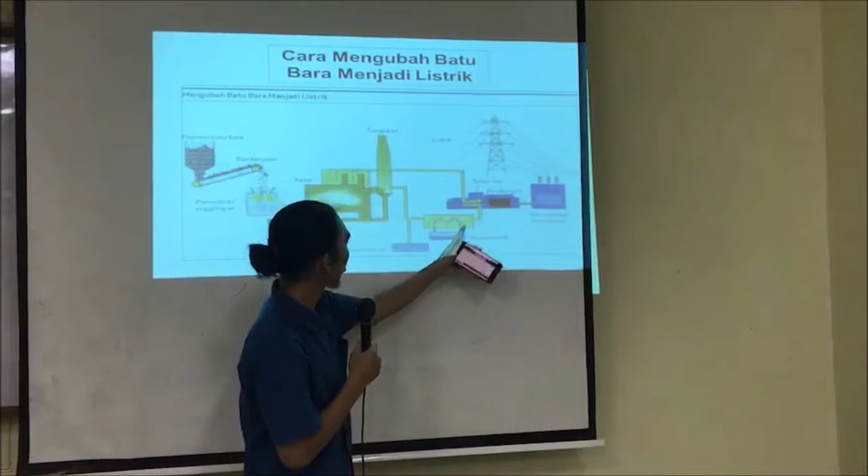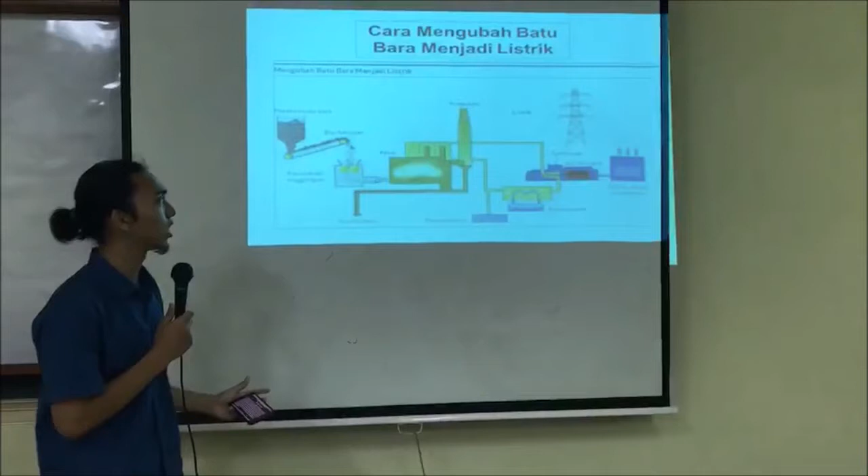Most coal was formed hundreds of millions of years ago, when much of the earth was covered by steamy swamps. As plants and trees died, their remains sank to the bottom of the swampy areas, accumulating layer upon layer. Eventually, a dense, spongy material called peat formed.

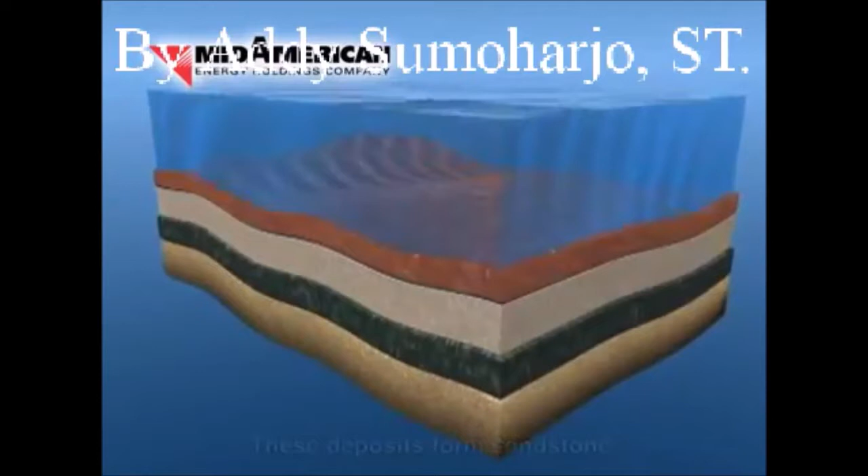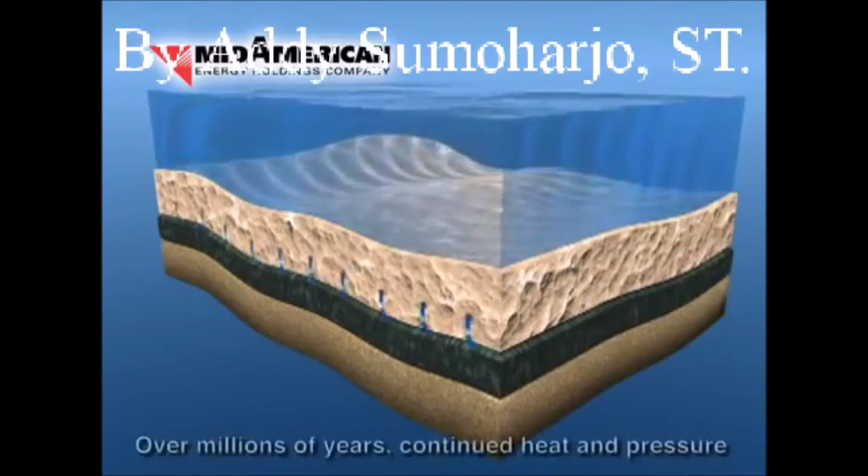The Earth's surface gradually changed. Seas and great rivers deposited sand, clay, and other minerals on top of the peat. These deposits formed sandstone and other sedimentary rocks, and buried the peat beneath the Earth's surface. Their weight squeezed water from the peat. Over millions of years, continued heat and pressure gradually changed the peat and sediment into coal.

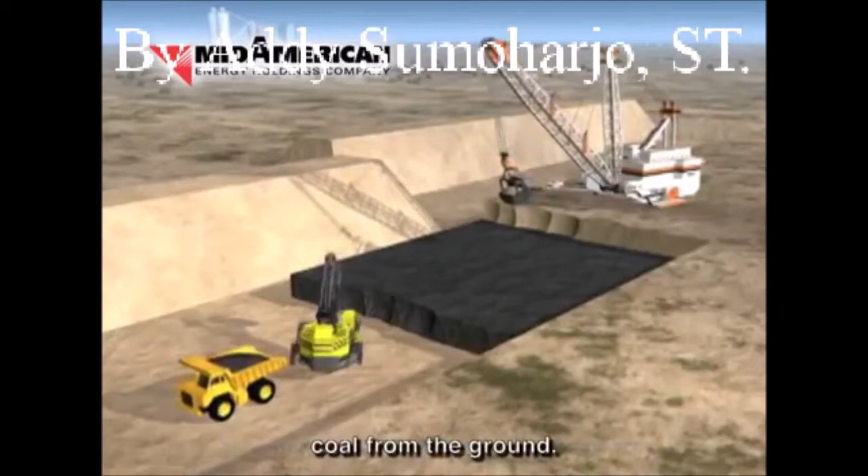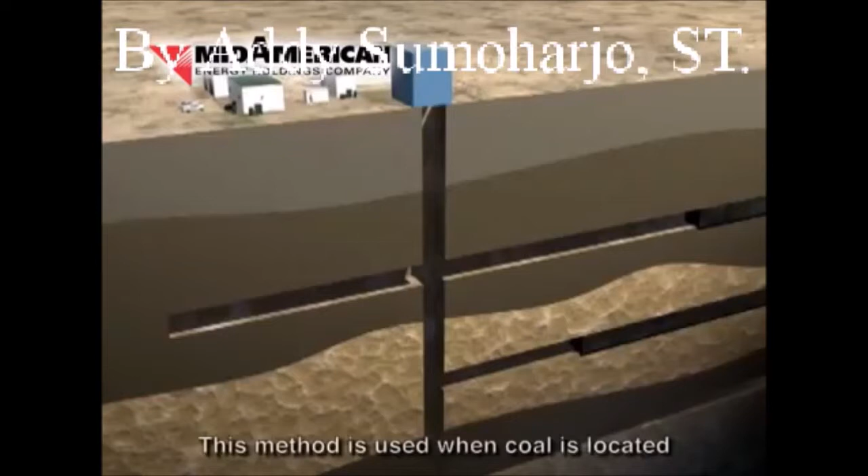There are two common ways to mine coal from the ground. The first method is used when coal lies close to the surface. With surface mining, topsoil and layers of rock are removed to expose the coal. The second method is underground mining, sometimes called deep mining. This method is used when coal is located several hundred feet below the Earth's surface.

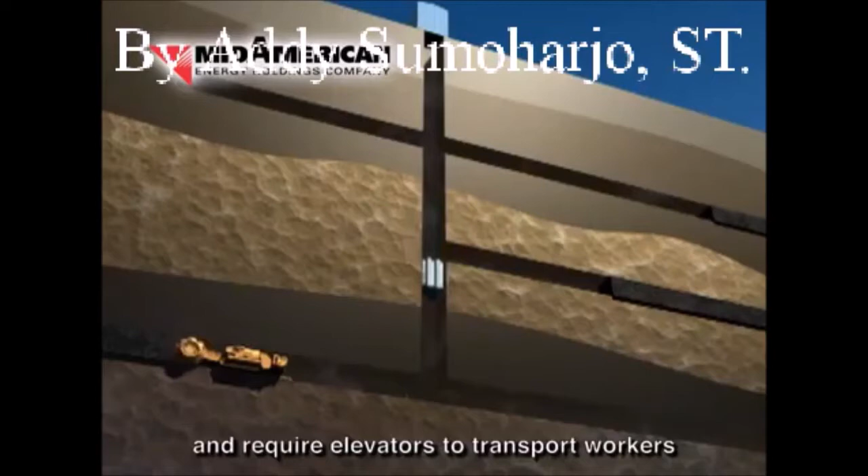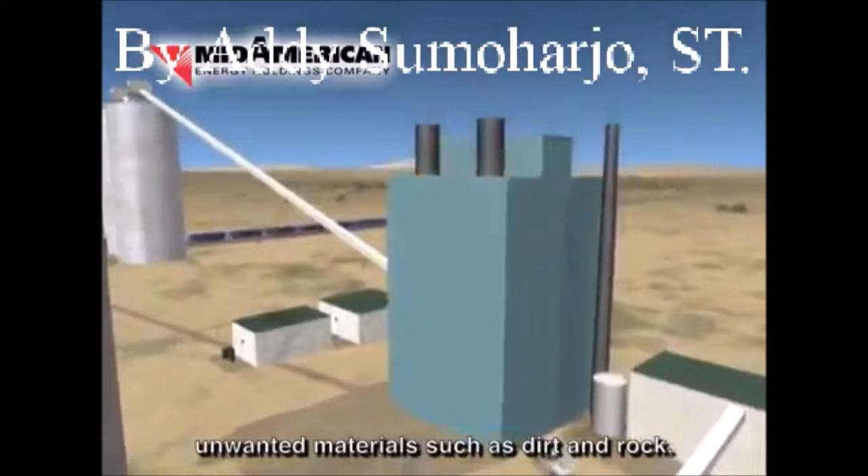Underground mines can be up to 1,000 feet below ground and require elevators to transport workers to the bottom of the mine. Once the coal is removed from the earth, it typically travels by conveyor belt to a preparation plant located at the mining site. There, it's cleaned and processed to remove unwanted materials such as dirt and rock. After the coal has been processed, it's shipped to market.

Most coal in the United States is transported by train. However, coal also can be shipped by barge, ship, or truck.

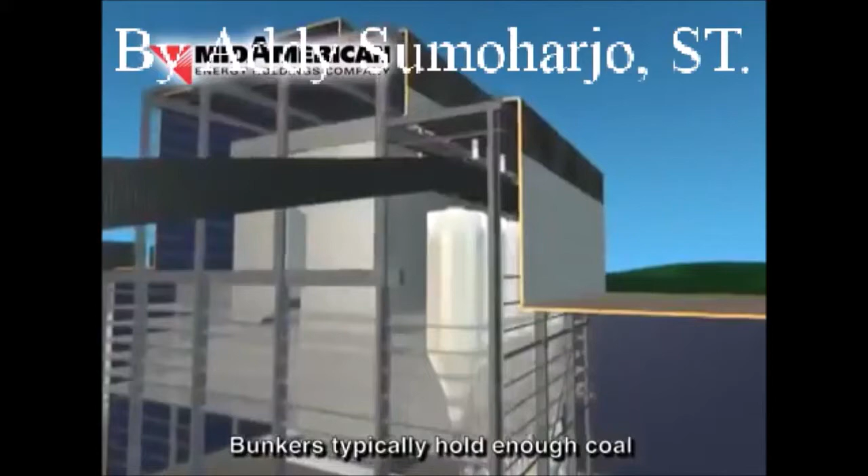The coal arrives at the power plant and is unloaded into a storage area. When needed, it's moved by conveyor belt from the storage area to bunkers in the plant. Bunkers typically hold enough coal to fuel the power plant for approximately half a day. From the bunkers, the coal is fed into mills that pulverize it into a very fine powder.

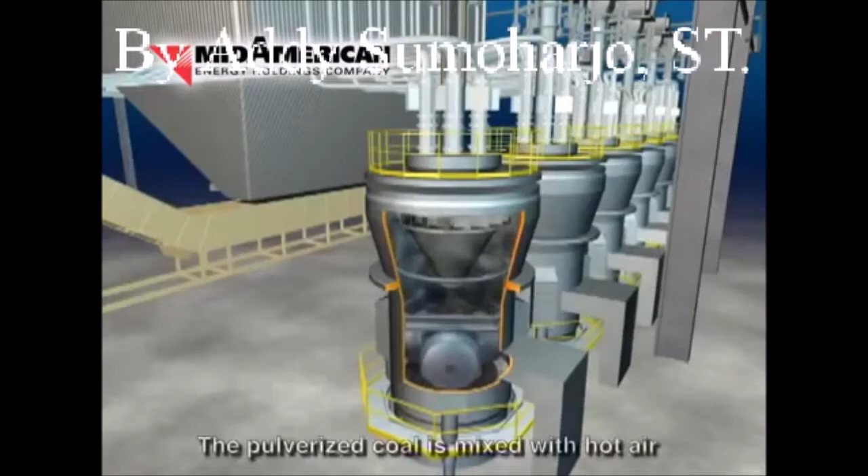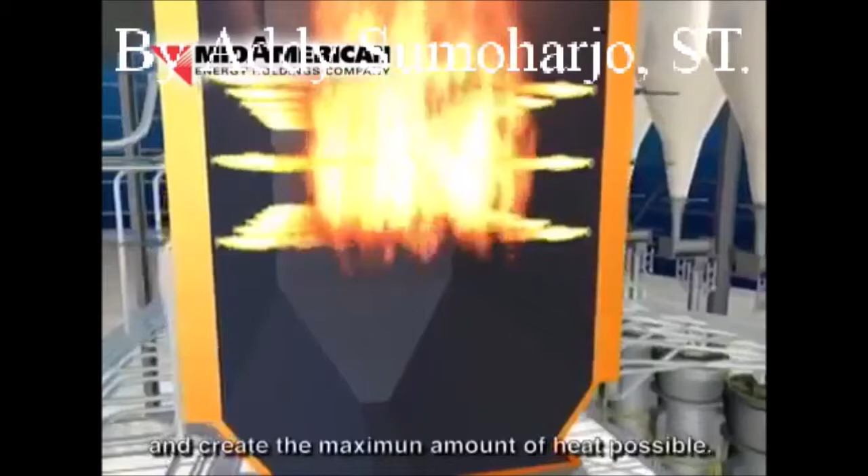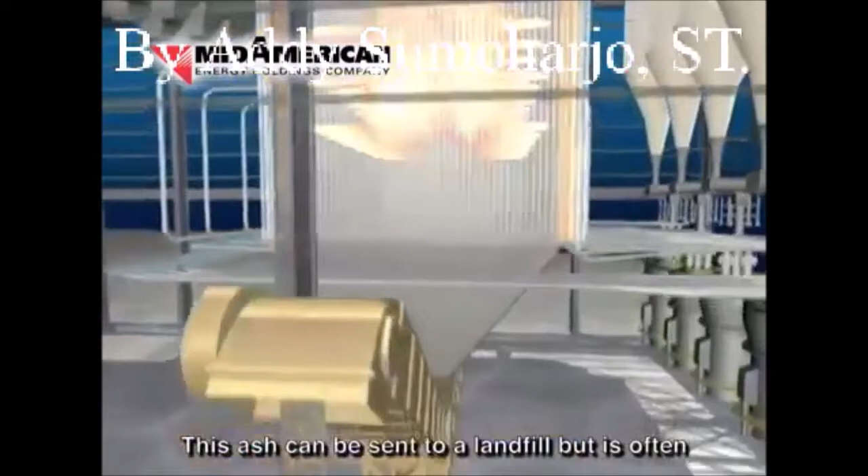The pulverized coal is mixed with hot air and blown into the boiler. Inside the boiler, burners ignite the coal and air mixture to achieve complete combustion and create the maximum amount of heat possible. Coal combustion residue called bottom ash collects in the bottom of the boiler. This ash can be sent to a landfill, but is often sold as material for roadway construction.

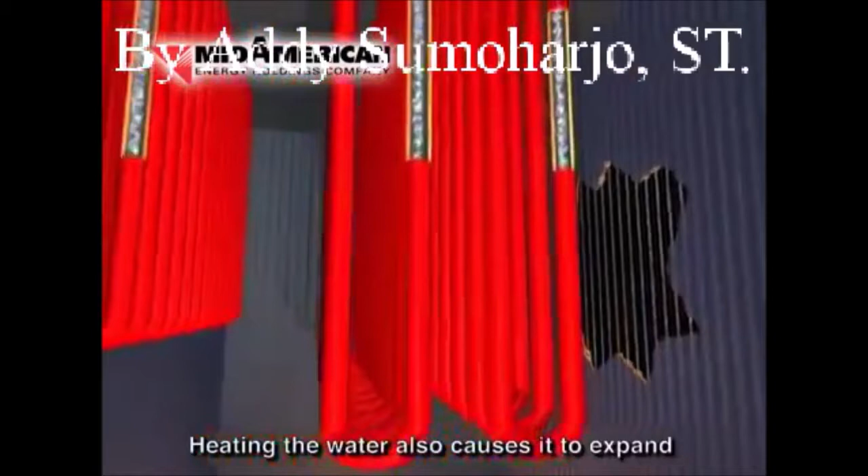The intense boiler heat turns water in tubes into steam that can reach up to 1,100 degrees Fahrenheit. Heating the water also causes it to expand and increases the pressure in the pipes up to 3,700 pounds per square inch. The steam passes through 4 turbines before it is turned back into water and used again.

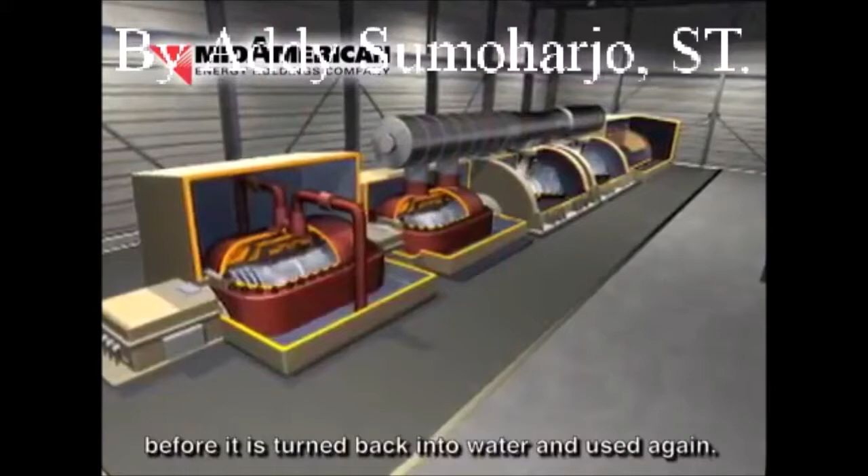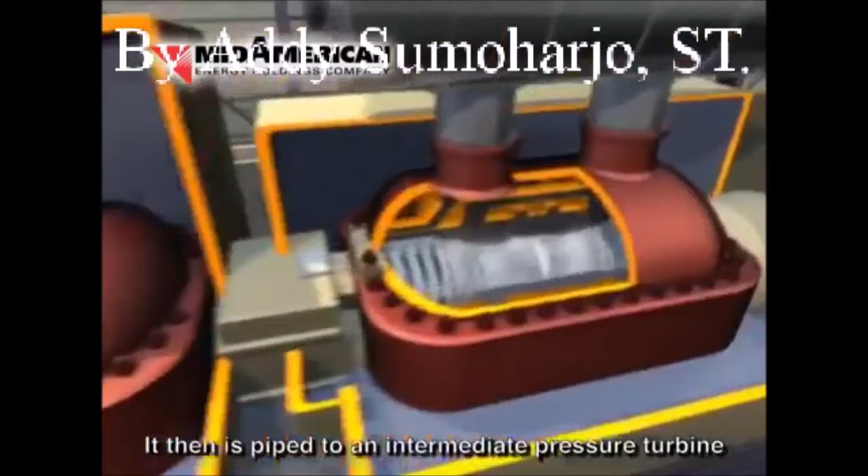The steam first is piped to a high-pressure turbine and then is returned to the boiler to be reheated. It then is piped to an intermediate pressure turbine and finally to 2 low-pressure turbines. The steam blasts into each turbine, turning blades that are attached to a single shaft.

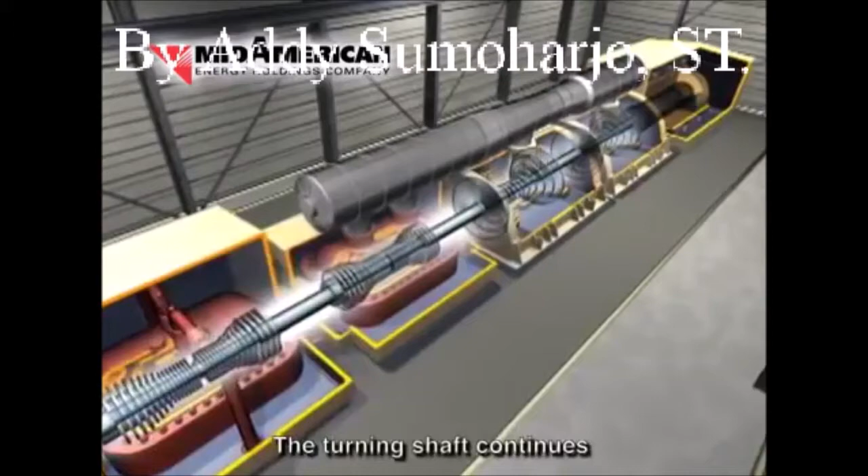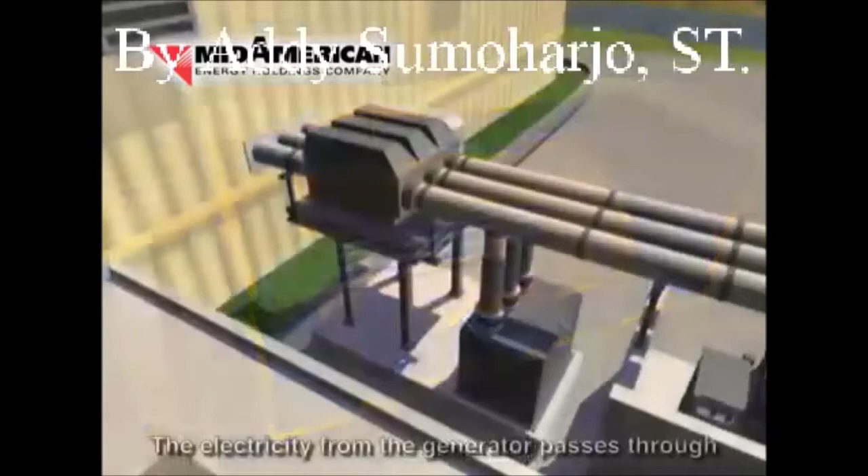The turning shaft continues into the adjacent electrical generator. As the shaft rotates, it turns electromagnets within a series of wire coils to produce electricity. The electricity from the generator passes through a step-up transformer where its voltage is increased. It then travels through the power lines that carry it to homes and businesses.

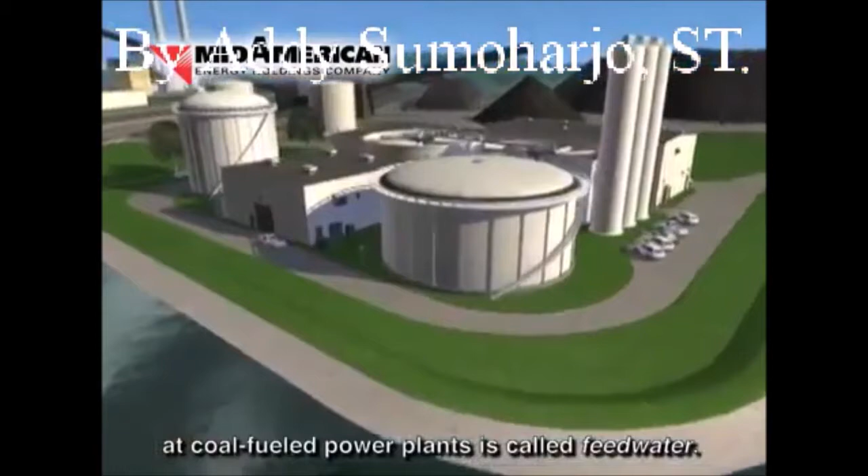The water that is heated into steam at coal-fueled power plants is called feedwater. This water typically is supplied by wells and passes through a cleaning system to remove minerals and other impurities. After the feed water converts into steam and moves through the low-pressure turbine blades, it passes across tubes within the condenser that turn it back into water.

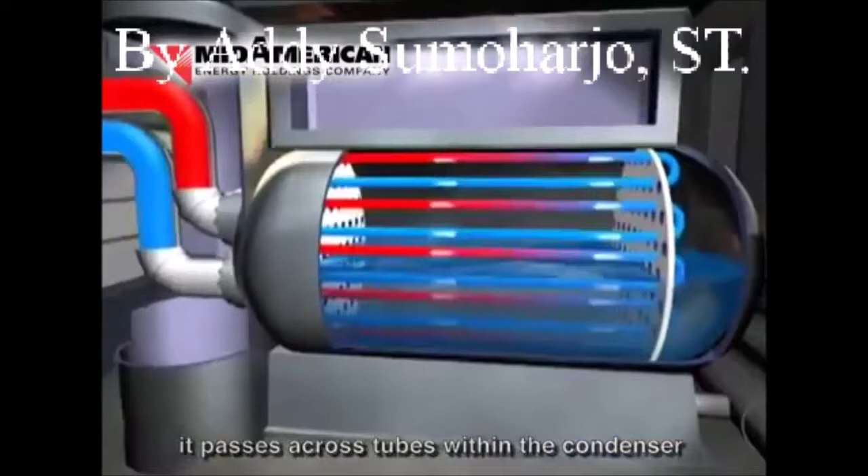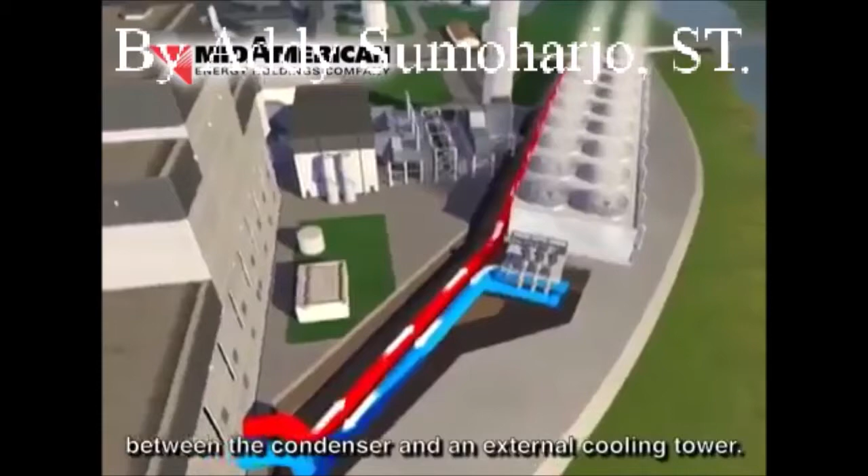These tubes contain cooler water from a separate circulating water supply. The circulating water constantly flows between the condenser and an external cooling tower. Fans and exposure to the air within the tower lower the temperature of the circulating water before it returns to the condenser.

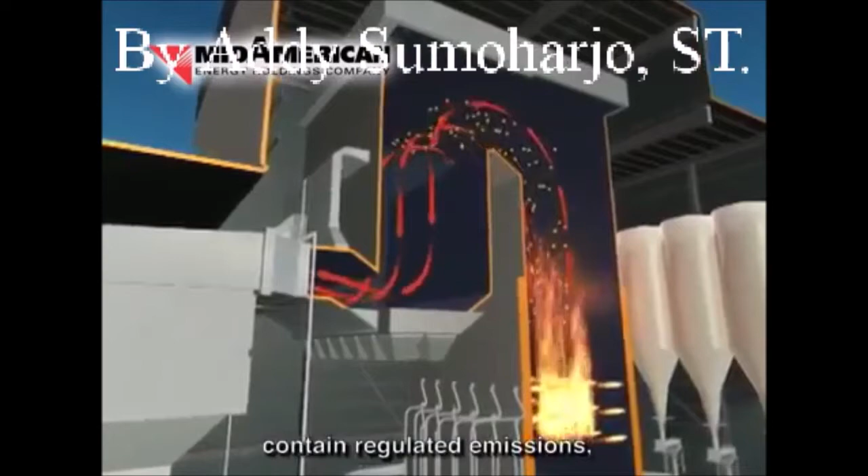Hot exhaust gases from the burning coal-air mixture contain regulated emissions such as nitrogen oxides, sulfur dioxide, mercury, and particles of ash. Before the gases are released into the atmosphere, they go through several processes to remove these materials.

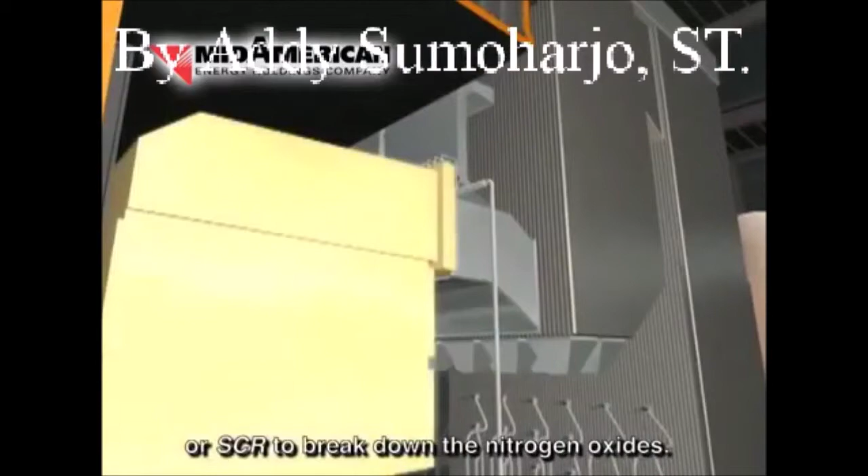The exhaust gases first pass through a selective catalytic reduction unit, or SCR, to break down the nitrogen oxides. The SCR contains modules with many plates coated with a chemical forming a catalyst. To begin the chemical reduction process, ammonia is injected into the gases. As the ammonia and nitrogen oxides pass through the plates, a chemical reaction breaks them down into nitrogen and water vapor.

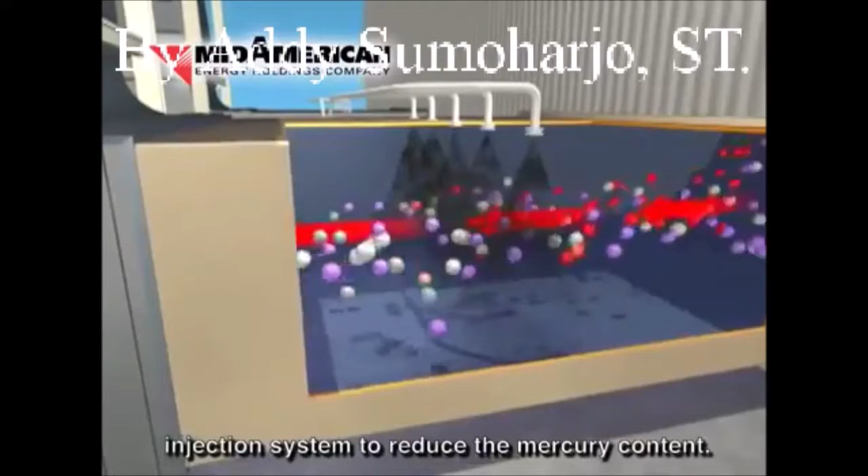Next, the gases pass through an activated carbon injection system to reduce the mercury content. The injection system sprays activated carbon into the gas stream. Mercury in the gases reacts with the activated carbon to form particles that are removed later in the process.

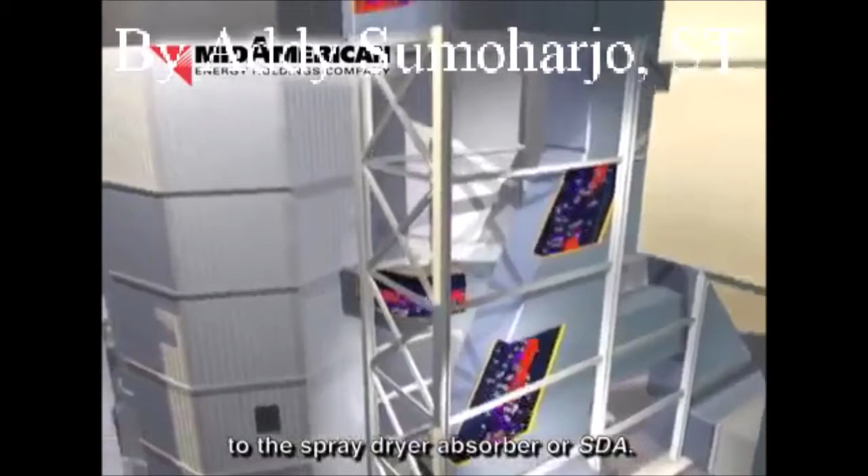The gases continue on to the spray dryer absorber, or SDA. As they enter the SDA, the gases are sprayed again, this time with a lime and water mixture that reacts with the sulfur dioxide to form particles that are collected downstream.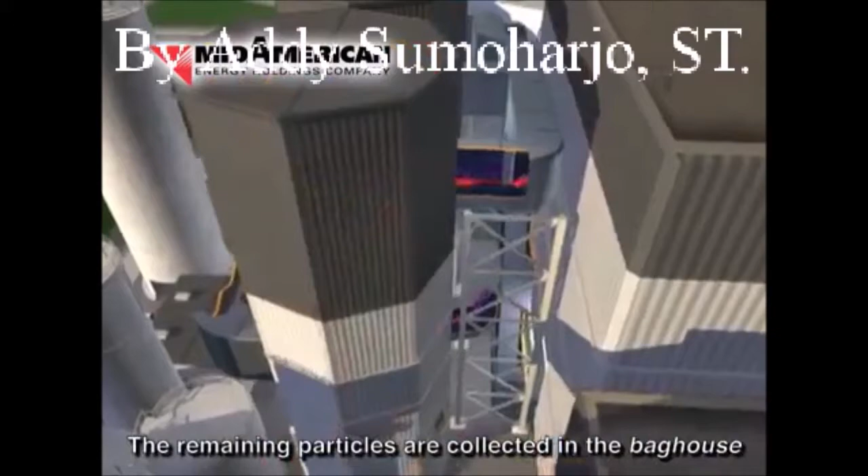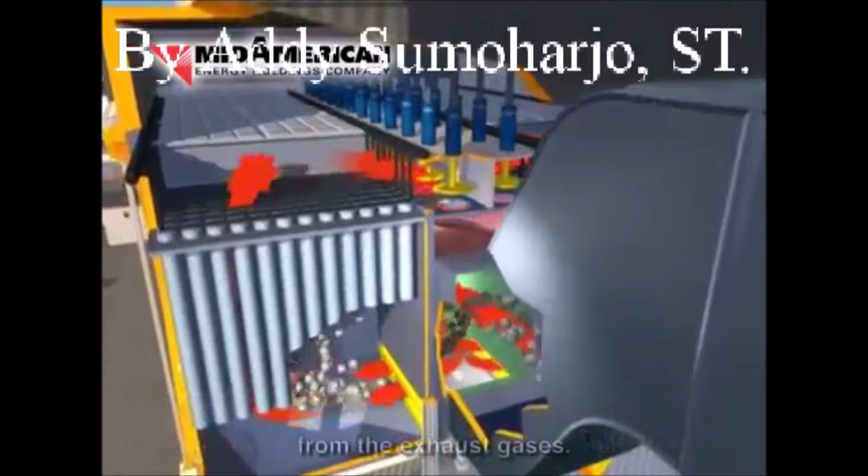The remaining particles are collected in the baghouse, an area containing large fabric filters. The baghouse acts like a giant vacuum cleaner to remove carbon, SDA dry product, and ash from the exhaust gases. The dry product collected here and in the SDA is periodically removed and taken to a landfill.

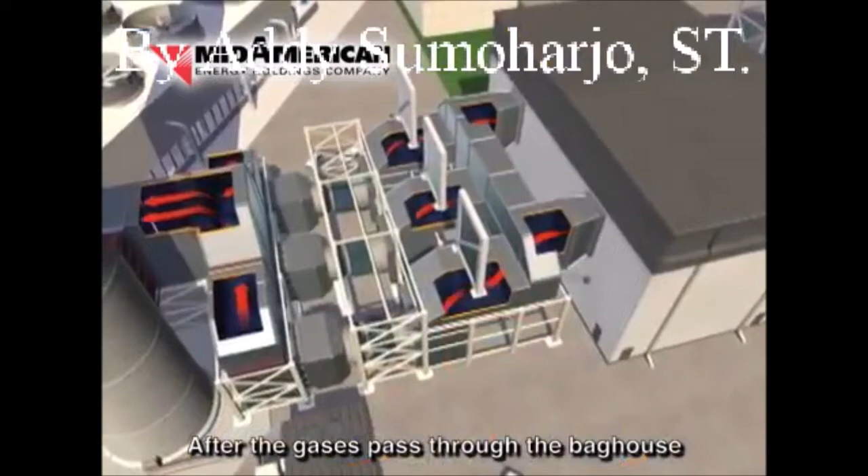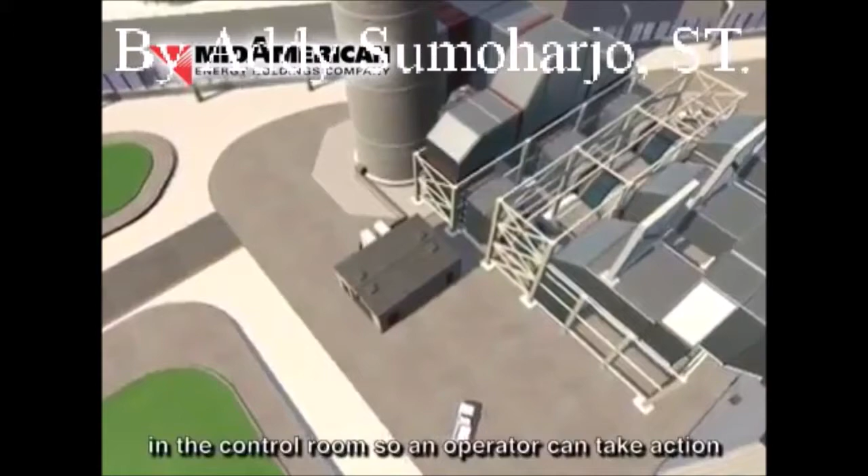After the gases pass through the baghouse, they are dispersed into the atmosphere through a tall stack. In the stack, a continuous emissions monitoring system analyzes the gases for sulfur dioxide, nitrogen oxides, carbon dioxide, and carbon monoxide. If the gases are above permitted levels, the monitoring system triggers an alarm in the control room so an operator can take action to correct the problem.